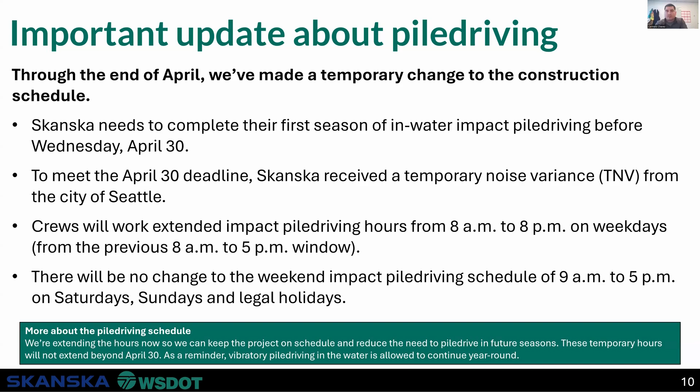I say we go back one more slide to the beginning, job overview. I think that one shows it. I know it didn't show the work bridge, but it showed the whole job. Do you want to walk through this one, Dave? Do you think this is better, or the work bridge drawing is better? I think the trestle one is probably better. Okay.

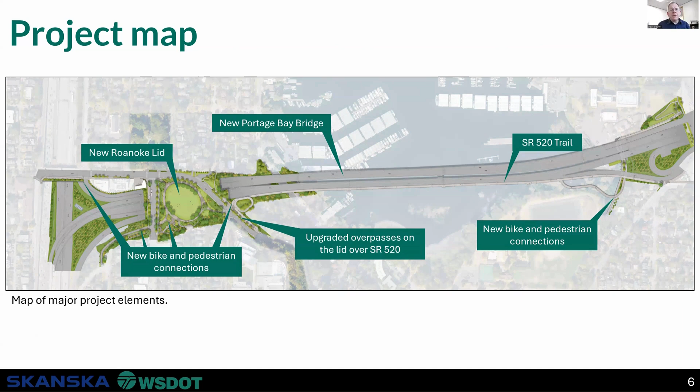Maybe just put a frame of reference, to identify where the Seattle Yacht Club is and NOAA, just so everybody understands where we're at. Let's see if my hand can wave. No, my hand can't wave. So who's driving? Is that Alan? Robin? Who's driving? That'll be Dakota. Okay, we'll take this, but slow. I can help get oriented here. You got to show the mouse. Can the mouse show that we're on the same page?

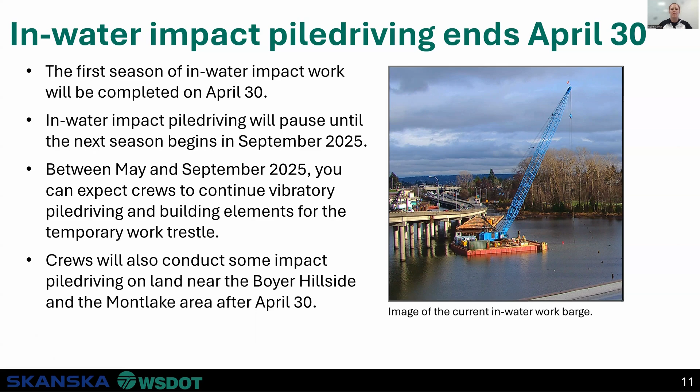And just a picture here, Carmelo mentioned the iron forest there. This is that location with the 30 piles that have been installed for that temporary bridge alignment. We'll take a look at what that alignment is going to be towards the end of the slideshow, but this is the current update for those piles. There'll be 34 more of those to be installed.

And just a note on impact versus vibratory pile driving. Again, the impact work is from September to April, and it's when you hear the sharp sounds of the hammer hitting steel. Whereas vibratory uses a different type of hammer to essentially shake the pile into the ground and vibrate it down to its foundation.

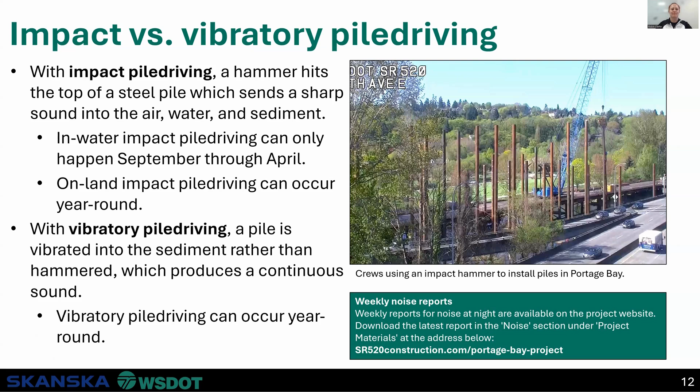All right, a couple more updates here. So some of the on-land impact pile driving, we'll be installing some additional piles on land in the Montlake area. Because of these soil conditions, we'll have a mix of that vibratory and impact. But again, in-water work will continue past April 30th with vibration only.

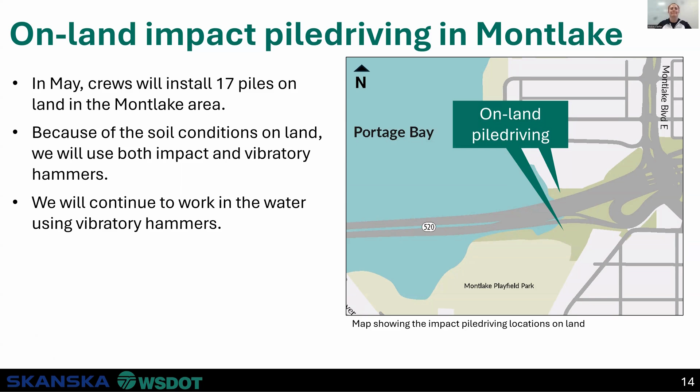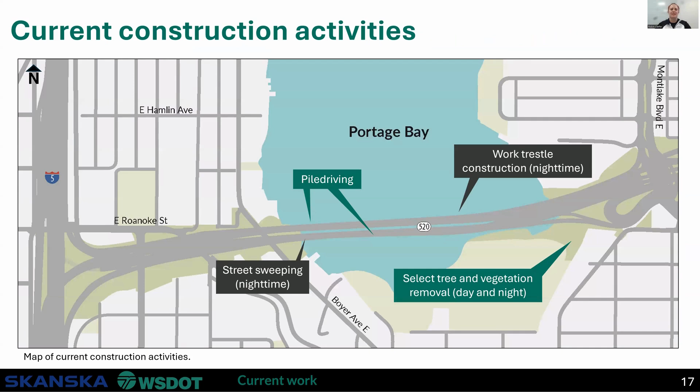All right, moving off of pile driving, some current construction activities. In addition to the pile updates and the work trestle construction, we are working on some select tree and vegetation removal on the Montlake area, as well as some nighttime sweeping along the main SR 520 alignment.

Some of the upcoming lane and ramp closures we've got to look forward to here. We've got our single lane closures on eastbound 520. Apologies for the lighting here, we sometimes have some technical difficulties, likes to turn off on me.

We have some single lane closures on eastbound 520 between I-5 and Montlake. That'll be Friday the 25th and Monday the 28th through the 30th, from 9 a.m. to 3:30 p.m. each day. That'll be in support of some of those pile driving activities.

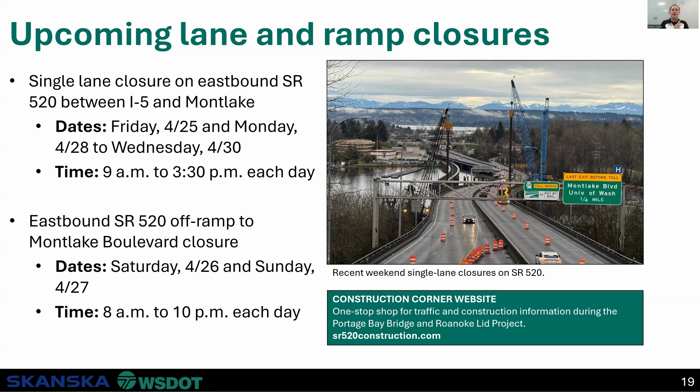And then we also have an eastbound 520 off-ramp closure beginning Saturday the 26th and Sunday the 27th. Those will be daily off-ramp closures from 8 a.m. to 10 p.m. And again, those are both closures that are going to be supporting some of those pile driving operations, because the pile installation is so close to the highway. We want to make sure that folks driving and folks working are going to be safe.

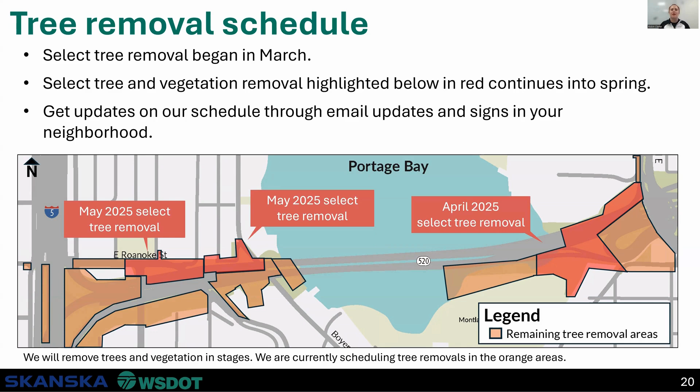So we'll continue on the east side of our project in the Montlake area through April, and then we'll head west to the Boyer Hillside and Roanoke area starting in May. We'll continue to update you guys as we move into those areas to keep you updated on what those impacts look like.

So here's an overview of what that tree removal near Montlake looks like. The larger trees you can see are going to be in conflict with the new Portage Bay bridges, as well as the new off-ramps and work bridges that we need to be able to construct all of these elements of work.

So we're going to be removing these sequentially in order to construct the project. We go through a pretty extensive process to make sure that we are selecting the right trees, and only the necessary trees that have to be removed, while also looking for opportunities to make sure we're not taking down trees that don't need to be removed.

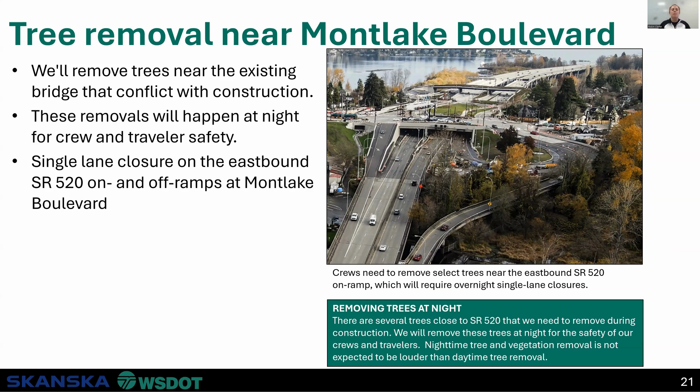We do have some upcoming lane closures and ramp closures that we will be using to take down some of the larger trees, again to make sure that we have a safety buffer between crews, the trees coming down, and folks driving on the highway, so nothing unsafe can happen. We'll make sure to continue to keep you guys updated on that.

As part of this, we also have some Bill Dawson Trail flagging that we'll be doing to make sure that pedestrians and bikers along the Bill Dawson Trail are not interfacing with some of that tree removal work. This will be intermittent through April and May, just to make sure we don't have an unsafe interface between you guys and the community.

That'll be happening through early May, and we will give you guys notice when that flagging starts. The flagging intervals are typically 10 to 15 minutes at a time. We'll have a person staged at one end and the other end of the work zone that will hold pedestrians and bikers for a short period of time before letting you guys through to continue about your day.

We'll talk a little more in a minute about the long-term Bill Dawson Trail. But starting May 12th, and I'm sure you guys have seen some signs popping up, we'll be closing this trail for up to 5 years in order to construct the new Portage Bay bridges and some of our work areas.

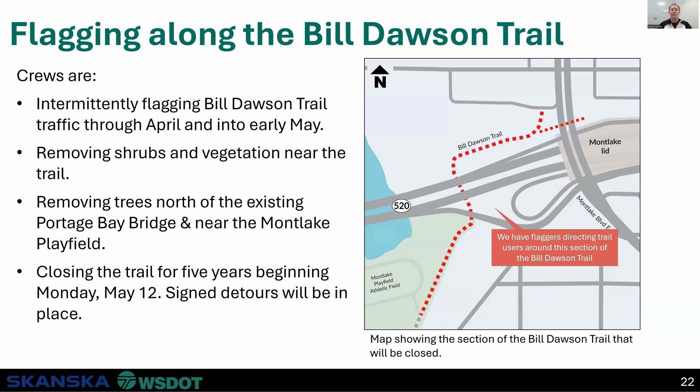So a little bit about the tree removal process near that Bill Dawson Trail. These select trees that I mentioned before are going to be removed so that we can improve the Bill Dawson Trail, the future Bill Dawson Trail, and the connections. We are going to be building, in addition to the new Portage Bay Bridge north and south, a regional shared use path.

And we'll also be upgrading and improving the area with landscaping, lighting, and general decorative hardscaping.

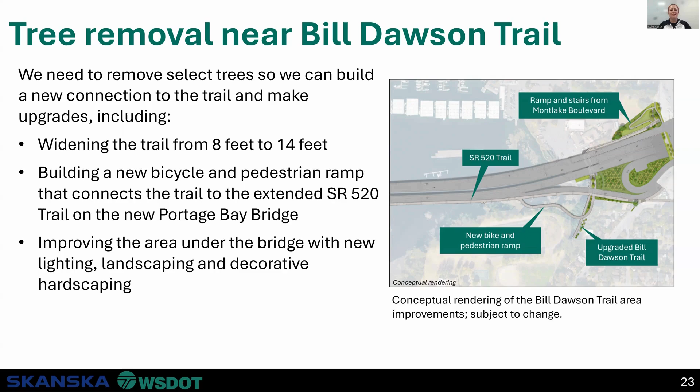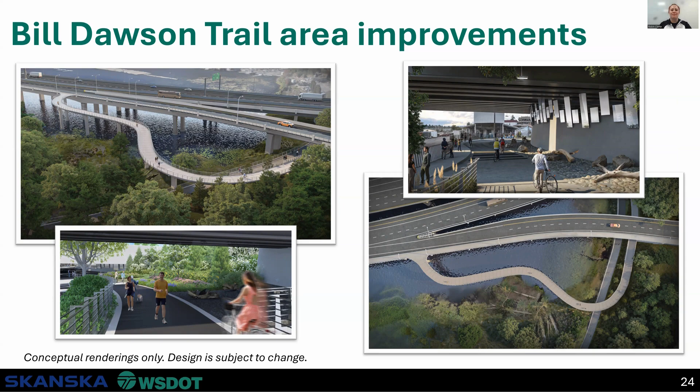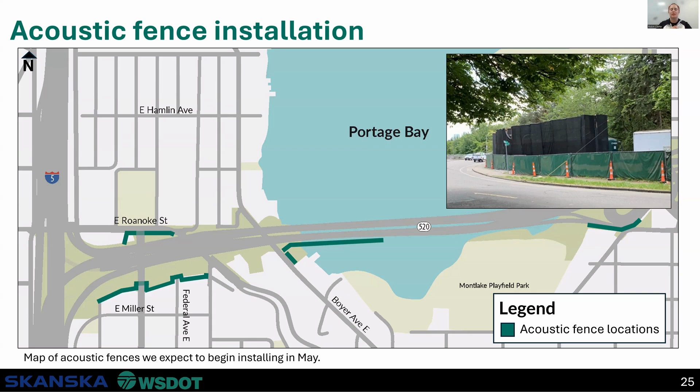Here's a picture of what that looks like. The black fencing you see there is the acoustic fence, while the smaller green chain link fence is more of a protection security fence. There's quite a differential in what the acoustic fence looks like, and it helps with noise dampening for construction activities close in proximity to homes.

Some updates on ongoing nighttime work. For April and May nighttime construction, we're continuing some sweeping along the existing Portage Bay Bridge, general movements to make sure we're maintaining the highway with no obstructions for vehicles. We also have some lane closures on SR 520 and the on-ramps to install environmental controls, including storm drain filters, and to remove trees near the highway.

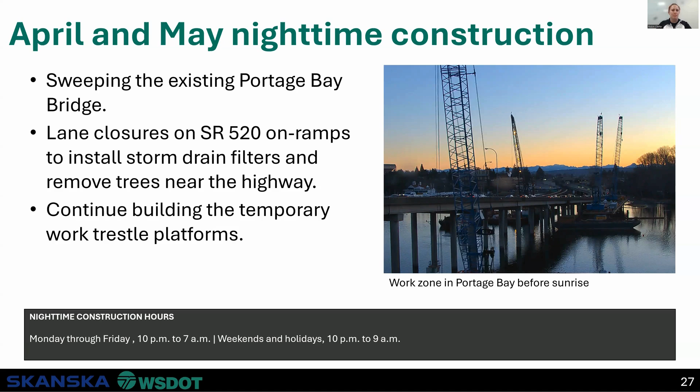We'll be continuing to build out the temporary work trestle platforms at night, so there is some work on the work bridges going on at night. But as some folks in these meetings have heard me say, we will not be doing any impact pile driving at night. Those work hours extend only to the 8 a.m. to 8 p.m. window we talked about before.

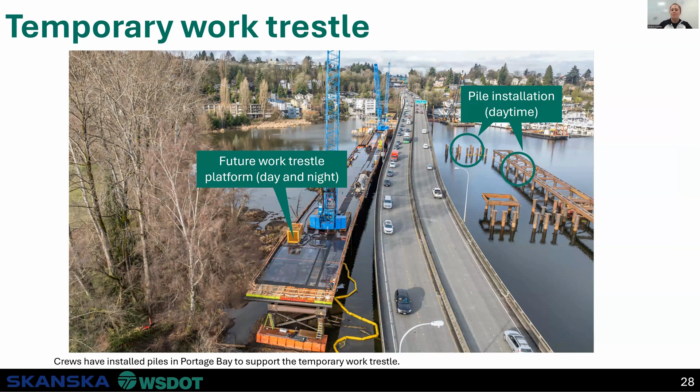Short-term look ahead for May and June, to talk about a couple upcoming construction activities. In addition to continued pile driving, we are going to be closing the Bill Dawson Trail for 5 years. We're looking at providing a date and schedule updates for the Boyer Stairs to start utility work in May and maybe into June. We'll continue tree and vegetation removal throughout the Roanoke and Montlake areas, and we're going to begin building the full temporary eastbound SR 520 exit to Montlake Boulevard.

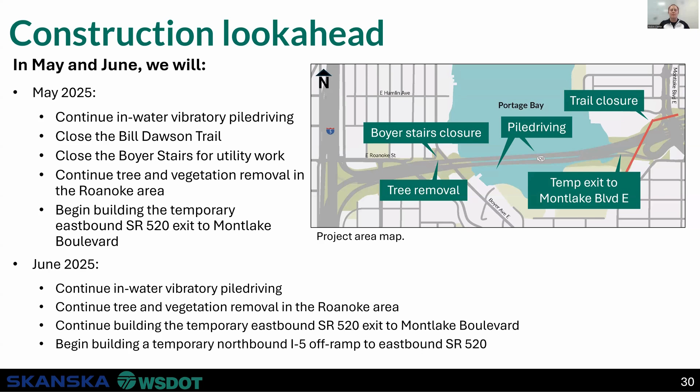Following in June, most of those activities will continue, and we'll also begin building a temporary northbound I-5 off-ramp on the west side of our project to eastbound SR 520. We'll talk about that more in future monthly construction meetings, but just know that some of that work is coming down the pipeline for us.

To talk about more of the west side work with utilities and upcoming work near Roanoke Park, we have some upcoming traffic and pedestrian effects happening this summer and into fall. We're scheduling utility work for a water main and a 26 kilovolt electrical line to be relocated along the Roanoke area and Boyer Stairs. The water line work is supposed to start this May, and our 26 kV relocation is supposed to start this August.

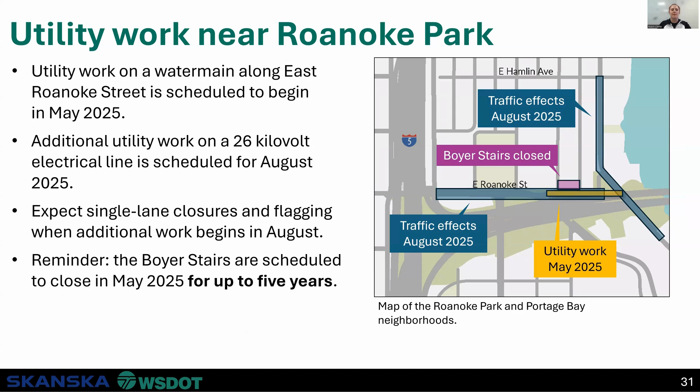We'll have some traffic closures to help facilitate that work, which we'll continue to update you on in these meetings. We'll update you once we have an official date for the Boyer Stairs closure, but similar to the Bill Dawson Trail, that stair closure will be for 5 years, and we'll be reconstructing those stairs at the end of this project.

To get into the long-term Bill Dawson Trail closure, on Monday, May 12th, we will be closing the Bill Dawson Trail for 5 years. The section you're looking at on this map shows our detours that we've worked through with the City of Seattle and the WSDOT team as the best path forward for bikers and walkers to access the different areas around Montlake and getting to and from the city.

The section in yellow with the X's across it is the section of Bill Dawson that is going to be closed. Those folks will still have access to the full Montlake playfield and the little track that runs around on the north side. This map shows all of the signed pedestrian and bicycle detours that folks will have available during this closure.

To talk a little about the why behind closing the Bill Dawson Trail for 5 years. I know that's kind of a frustrating thing because the Bill Dawson Trail just opened after the Montlake Tunnel previous project. And now a new contractor, Skanska, is coming in saying we're going to be closing it down for 5 years. That's pretty frustrating to hear as news.

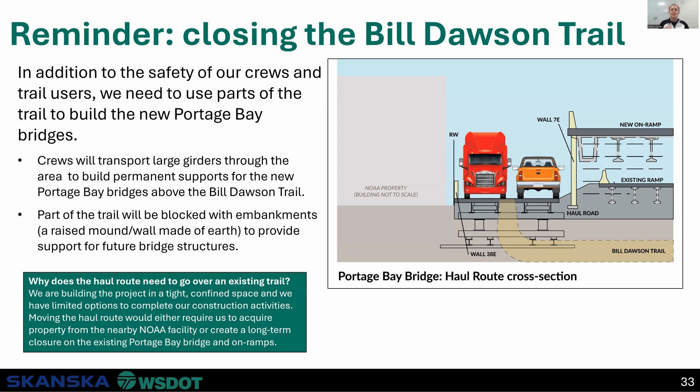Part of this trail during the full construction of that 5 years is going to be blocked with embankments to provide support for both the future bridge structures and our temporary work trestle. And we're also going to have a lot of construction traffic via a temporary access road coming through that area.

Here's an overview of what that temporary access route is going to look like. We'll have trucks coming down from the Montlake Boulevard area to access that north trestle, bringing material, concrete trucks, and other items onto the work trestle, in addition to equipment, so that we can access the construction area.

This will allow us to maintain safe access to the work trestles, and it eliminates some conflicts with trail users and our heavy equipment operations. It allows us to safely transport all of our cranes, drill rigs, personnel lifts, and big equipment that could otherwise cause a potential issue throughout that trail area.

So it's a lot of construction elements, a lot of information, and quite a bit of time, but this also allows us to limit our traffic impacts for the existing 520 bridge.

We are looking at limiting our closures of the existing 520 during the Portage Bay Bridge North and South construction by constructing a series of traffic shifts. Oh, there go the lights again.

Thank you, guys. My colleagues in the room are helping with the lighting.

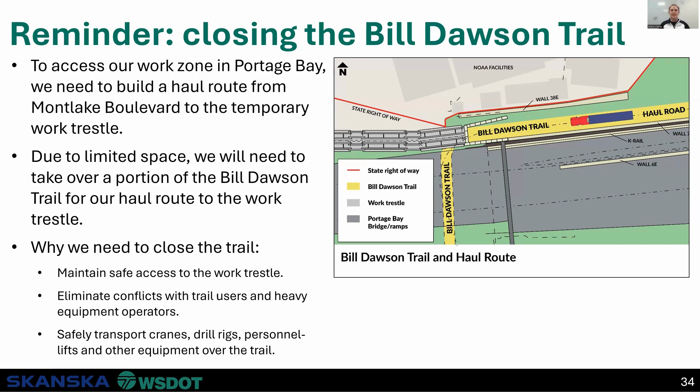This work trestle access allows us to utilize the existing 520 and some temporary ramps and bridges to shift traffic throughout the next 5 years so that we can limit our overall closures on the existing 520 bridge, which again limits vehicle congestion there.

So I've talked a lot. Here's an overview of what that's looking like from the eyes in the sky. We'll touch on the Q&A here in a minute. Got a couple more slides to run through, but you guys have heard me talk a bunch. We'll open for Q&A in a moment if anyone has specific questions on the Bill Dawson Trail, but I just wanted to give you some background and history on that.

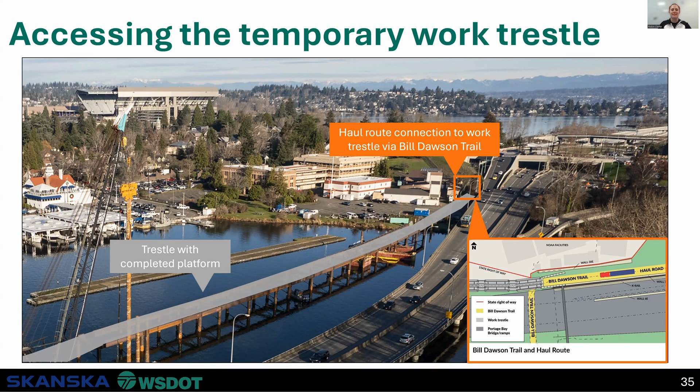One more thing we'll talk about is what Carmela mentioned before: temporary bridge 1, which we're constructing in lieu of the existing off-ramp, the existing eastbound 520 exit to Montlake Boulevard. We're doing this to essentially start that series of traffic shifts for the new bridge construction and the existing bridge removal. We're starting with the pile driving process now, but we'll be working throughout the summer to get that fully built out.

Eventually we'll conduct at least 2 weekend closures so that we can shift traffic from the existing off-ramp, shown in red in the picture, to the new ramp, shown in blue. It's not a big shift, but it's enough to allow us to access the work zone and the new bridge alignments.

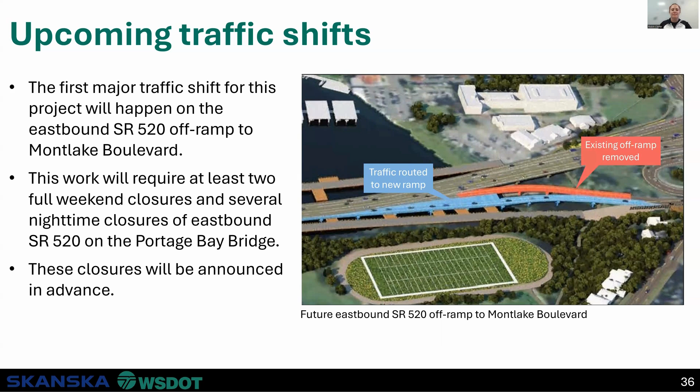All right, last topic of this meeting: long-term look ahead for 2025. Just some highlights for 2025. Pile driving will continue through April 30th with our impact pile driving, and we'll continue vibratory pile driving in water throughout the year.

Our season 2 of in-water impact pile driving will begin September 1st, but we'll have some on-land impact pile driving intermittently this summer. We'll have traffic control on city streets, and some full closures of SR 520 as well as the off-ramps. But we'll give you good notice through emails, this monthly construction meeting, and our listservs, so we can give you a heads up on when those are coming. We also have utility work coming up on the Boyer Avenue hillside.

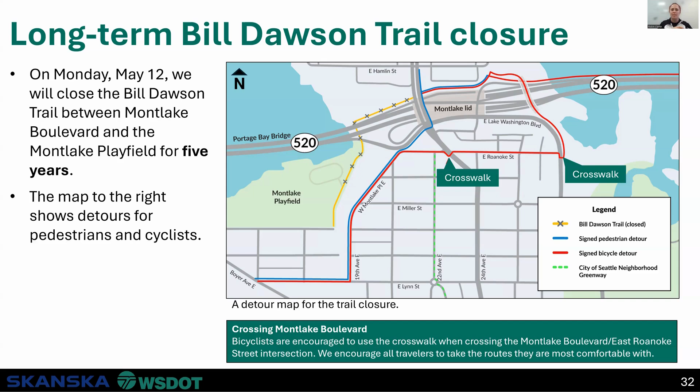The locations of those fingers on the south work trestle currently conflict with where the existing 520 bridge sits as it is today. So those ones we can't construct until the existing 520 is removed, which will be a couple years or a couple seasons from now. We'll update you when that starts. But the bulk of our work is complete at this time.

Just to double down on that, for the south work bridge next to the play field - complete, question mark. The main line is just about to wrap up right now. We're installing the temporary Bridge 1 piling for that widening of the new off-ramp. That's what's going to be driving through the April 30th timeline. After the 30th, come May 1st, we still have some upland piles to install.

Monday through Friday for the normal work hours. For the temporary Bridge 1, there's 9 piles on the upland side. And for the trestle, there's another 4 bents worth of pile driving to finish that south area next to the play field. The trestle fingers on the south main line, the ones just outlined, won't be installed until 2028. I wanted to be pinpointing clear about that south piece by the play field.

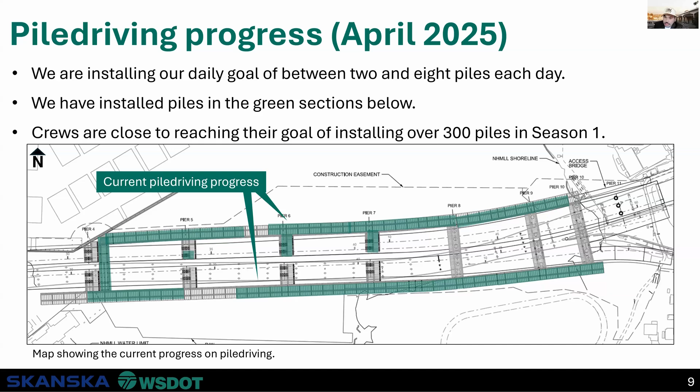So we have about 10 minutes left in the formal meeting. We do not have any questions in the queue. I'm going to give it one more minute to let folks type out any questions they may have. As a reminder, we're always available via the project inbox and our construction hotline if anything comes up afterwards. I'm not seeing anything come through. I'll start with my closing remarks then, and if any questions do come up I'll read those out. But that does bring us to the end of our queue.